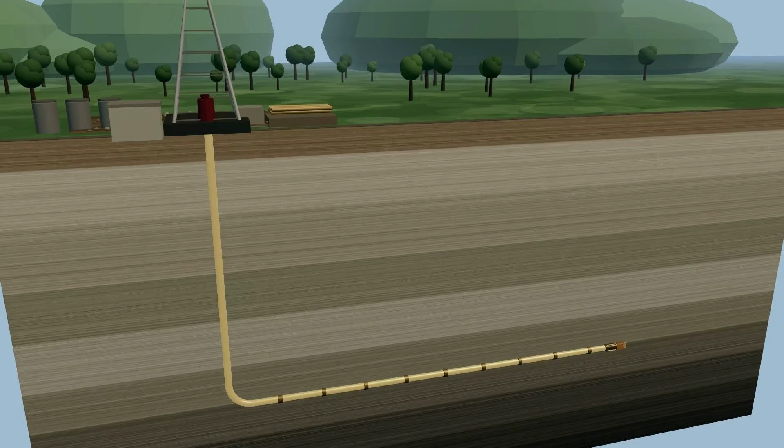2.5 miles. That's how deep the average oil and gas well is drilled into the earth. Some go much deeper, like the deepest hole ever drilled, which reached over 7.5 miles, or about 12 kilometers into solid rock, deeper than the ocean at almost any point on Earth. And we do this every day, all over the world. So how do you actually drill a hole that deep?

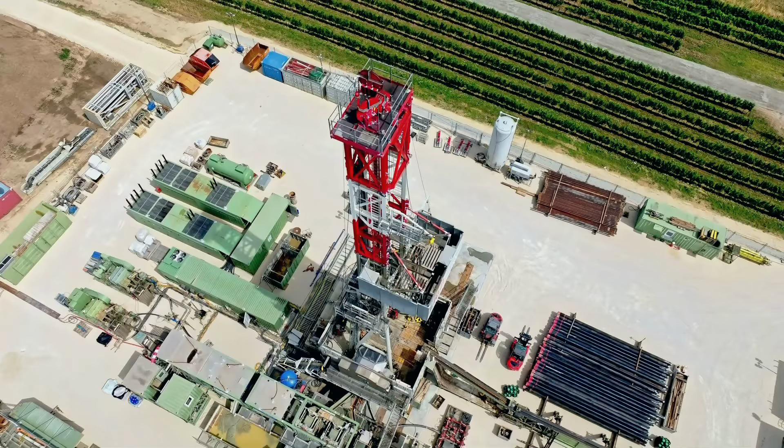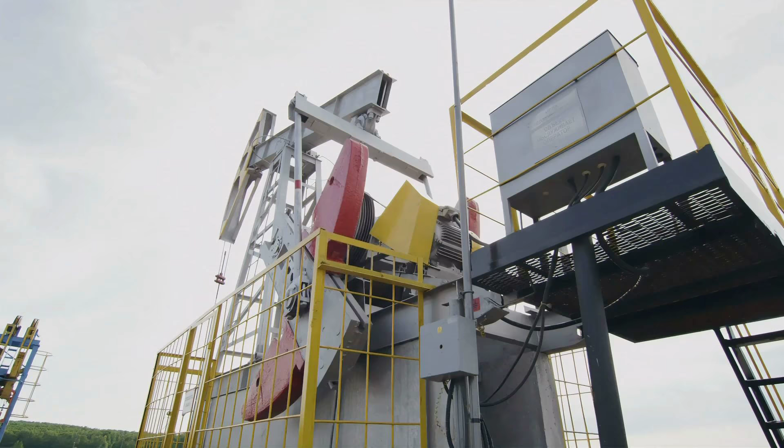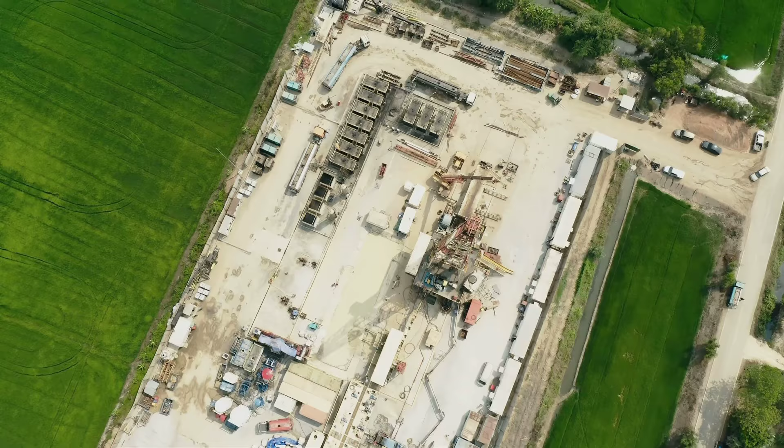The answer starts with what we're actually drilling for. A well goes after hydrocarbons, crude oil, natural gas, or some mix of both, trapped in rock formations deep underground. Most wells these days actually produce gas, or a combination of gas and crude oil. The exact product depends on the geology, not the equipment. And the process of drilling, the actual engineering of it, has gotten dramatically more sophisticated over the past few decades.

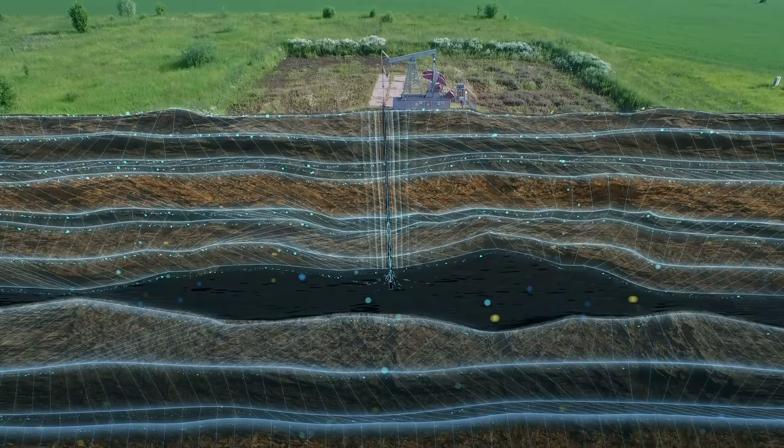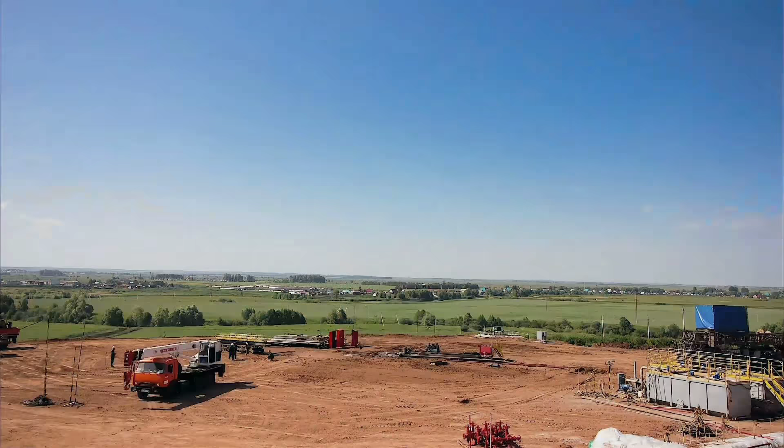Before any drilling begins, you have to decide where to drill. That decision comes from geology, surveys of the rock formations underground, often using seismic data that maps the layers miles below. Once a spot is chosen, a pad is prepared, a leveled, engineered surface with everything the operation needs. Then the rig is moved onto the pad and positioned over the exact point where the well will go.

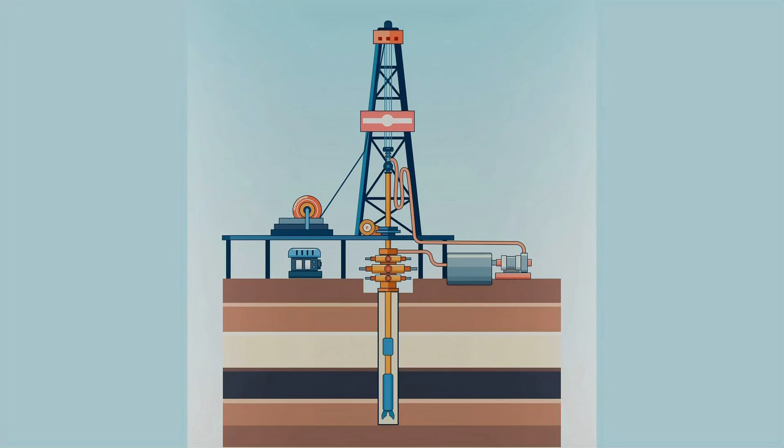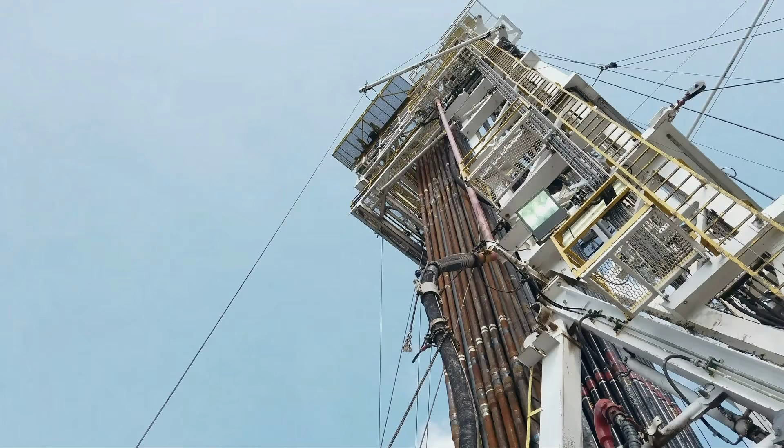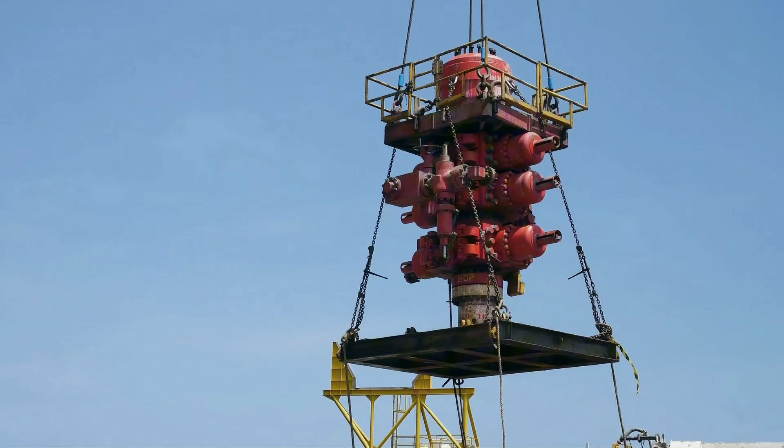Now, the word moved is doing a lot of work in that sentence. A modern deep drilling rig isn't a single structure. It's an entire facility spread across the pad, with dozens of major components. The derrick, the steel tower most people picture when they hear the words drilling rig, is just the most visible part. Around and beneath it sit the mud pumps, the mud tanks, the drawworks, the power generators, the blowout preventer, the control rooms, and storage racks for thousands of feet of drill pipe.

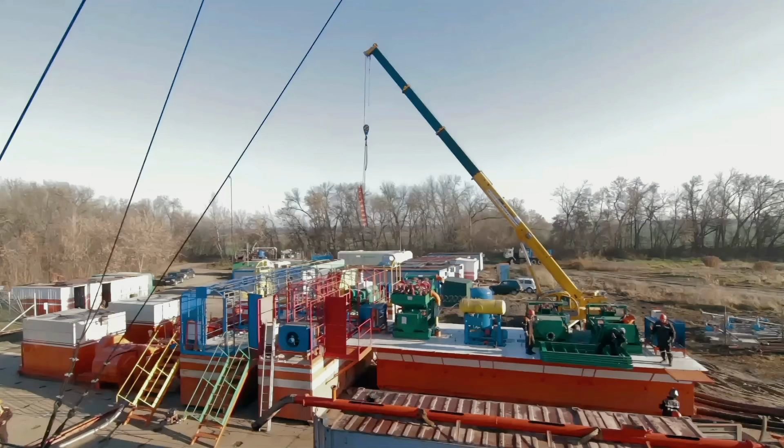Moving a rig between locations can take anywhere from roughly 30 truckloads for a smaller rig to 100 or more for the bigger rigs. The derrick itself is the tower that handles the drill pipe.

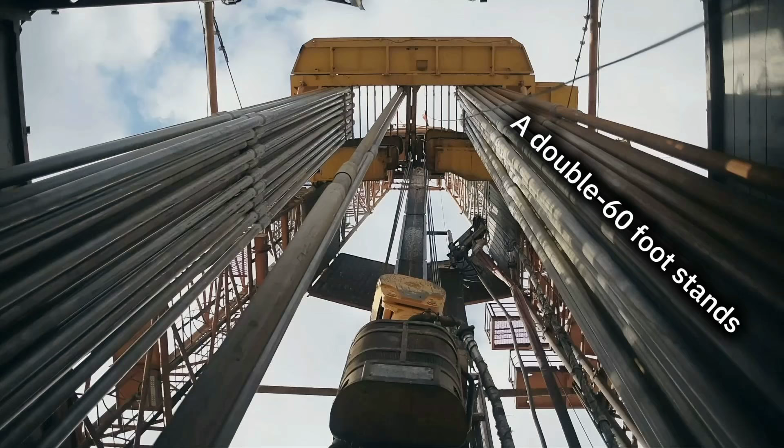Each piece of pipe is about 30 feet long. Larger rigs join multiple pieces into stands. Two joints make a 60-foot stand on a double rig, and three joints make a 90-foot stand on a triple rig. The stands get racked vertically inside the derrick, which is why a deep drilling rig stands as tall as a 10-story building. It has to be tall enough to hold those stands upright.

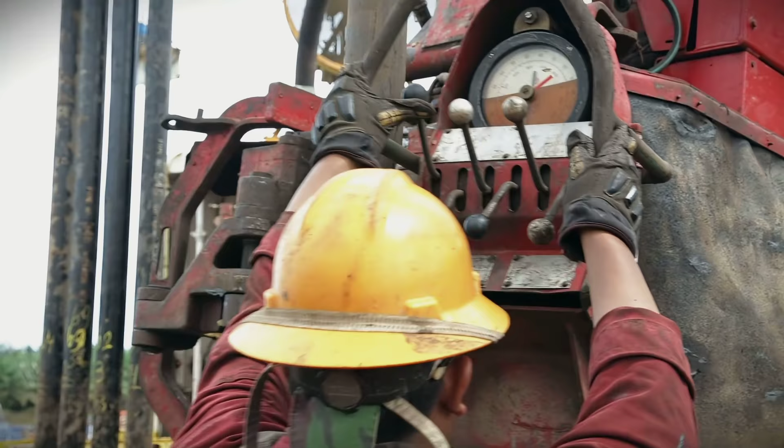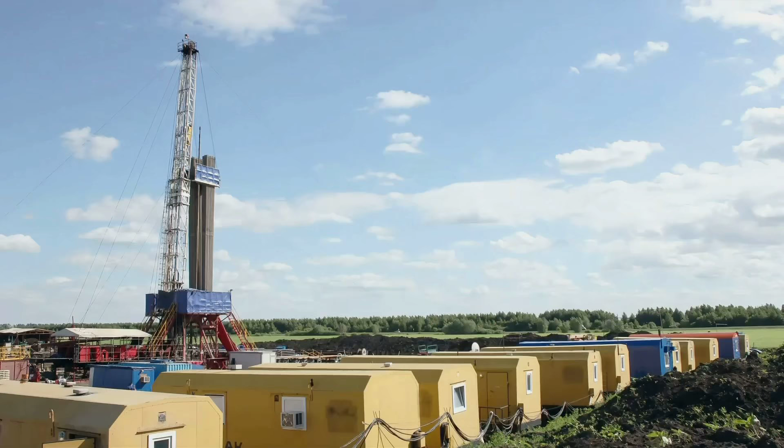At the surface, the drill string descends from the top of the derrick into the hole. As the bit cuts deeper, the crew on the rig floor adds new stands to the top of the drill string. The rig, as a whole, is a system for continuously extending a piece of steel pipe, miles into the earth. The pipe doesn't cut the rock, though.

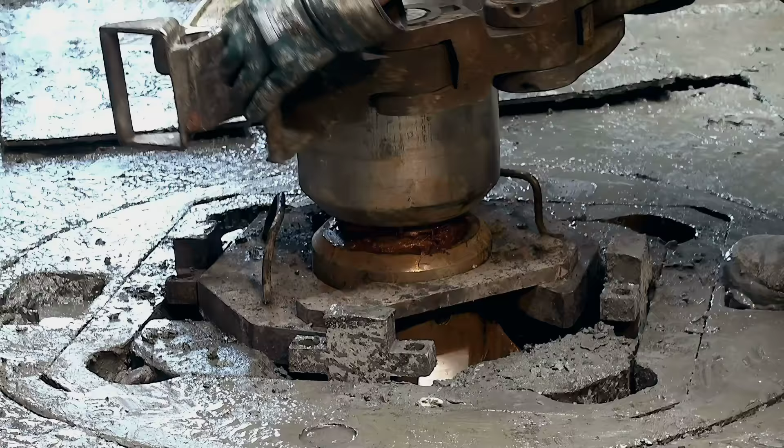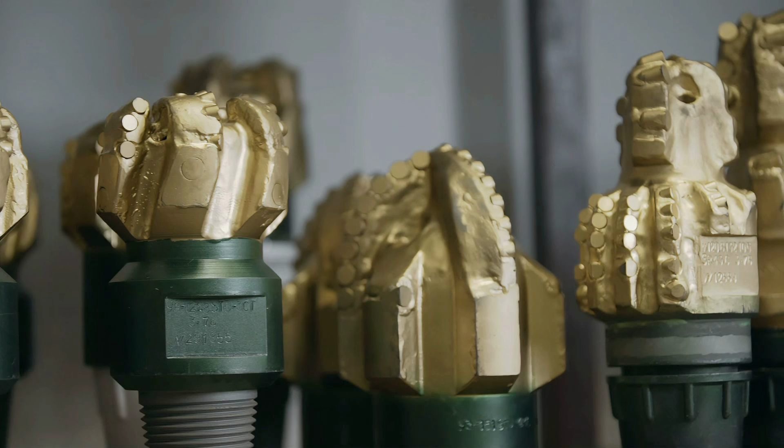Something at the bottom of it does. At the bottom of the drill string is the bit, a steel head studded with cutting elements. Bit sizes depend on the section of the well being drilled. They can be as large as 42 inches at the top of a well, narrowing to as little as 6 inches at the bottom. For softer rock, the cutters are tungsten carbide. For harder rock, they're synthetic diamonds, or polycrystalline diamond compact.

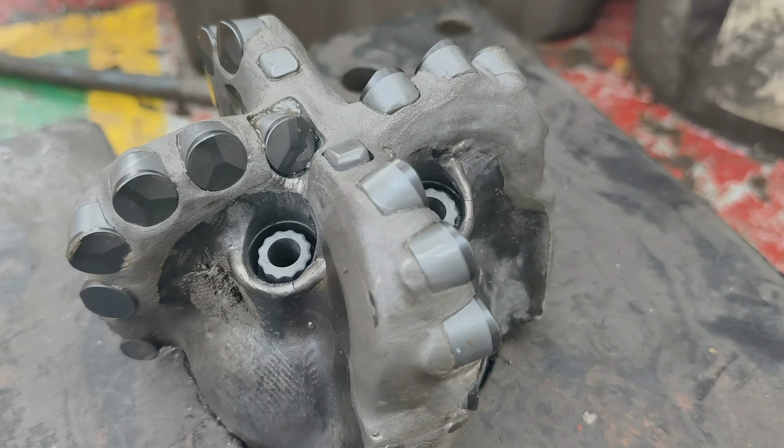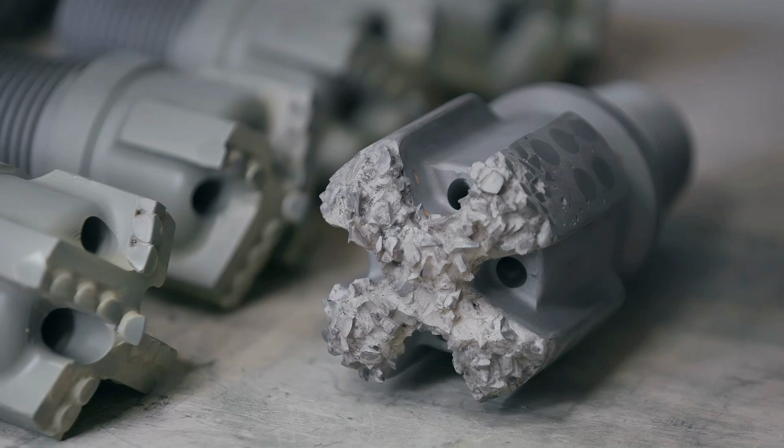The bit doesn't blast or hammer the rock. It cuts it slowly as the drill string rotates. And here's the part that surprises most people: the bit isn't being pushed down. The drill string above it, thousands of feet of solid steel pipe, weighs enough on its own to provide the cutting force. The driller's job at the surface is to control how much of that weight rests on the bit. Too little, and the bit doesn't cut. Too much, and the bit wears out fast, or the well goes off course.

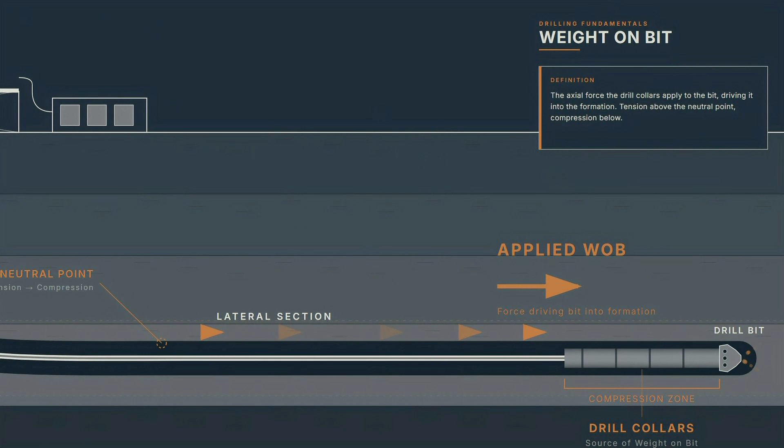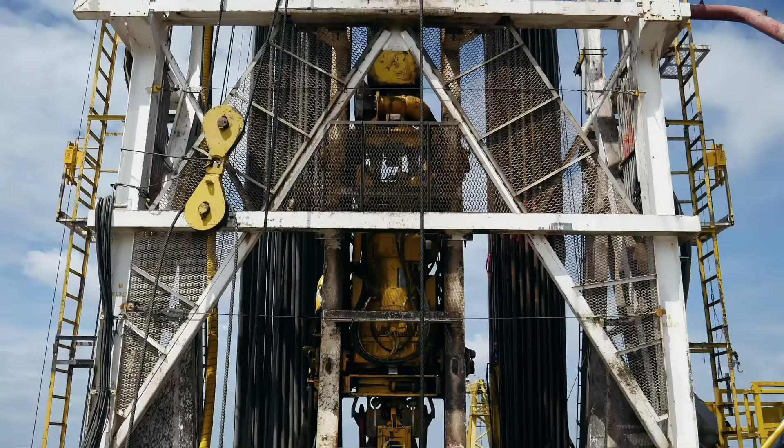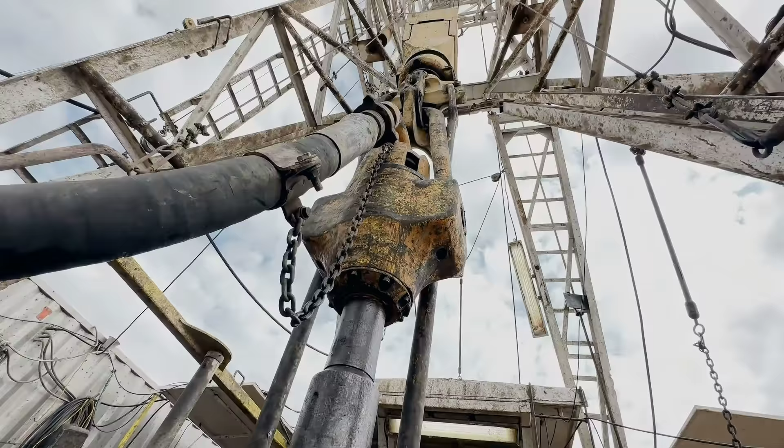The amount of weight applied is called weight on bit, or WOB, and it's one of the most carefully controlled variables in the entire operation. The rotation comes from a top drive, a large motor assembly that hangs inside the derrick and threads into the top of the drill string. The whole unit weighs hundreds of thousands of pounds and travels up and down the derrick on guide rails as drilling progresses. Older rigs used a system called a Kelly, where rotation came from a rotary table on the rig floor. But modern rigs almost all use top drives. They're faster, safer, and give the driller more control.

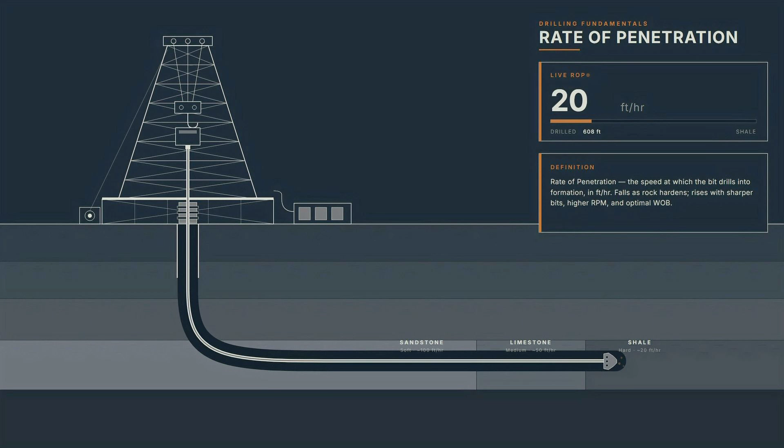As the top drive turns the entire drill string, the bit at the bottom, thousands of feet below, turns with it, cutting rock and advancing the hole. The combination of weight on the bit and how fast it spins determines how fast you drill. That speed is called the rate of penetration, or ROP.

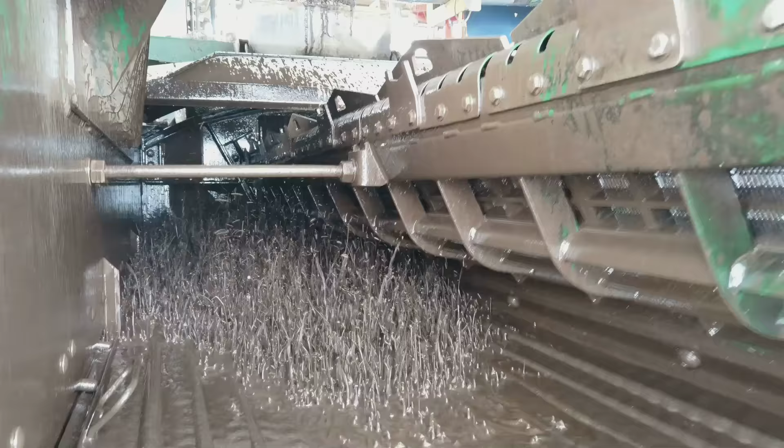But none of this works without another component that most people would never guess: the drilling fluid, commonly referred to as the mud. The mud travels down through the pipe, out through nozzles in the bit, and back up to the surface through the annulus, the open space between the drill string and the wall of the hole. At the surface, the mud passes through shakers, vibrating screens that separate out the cuttings and solid debris.

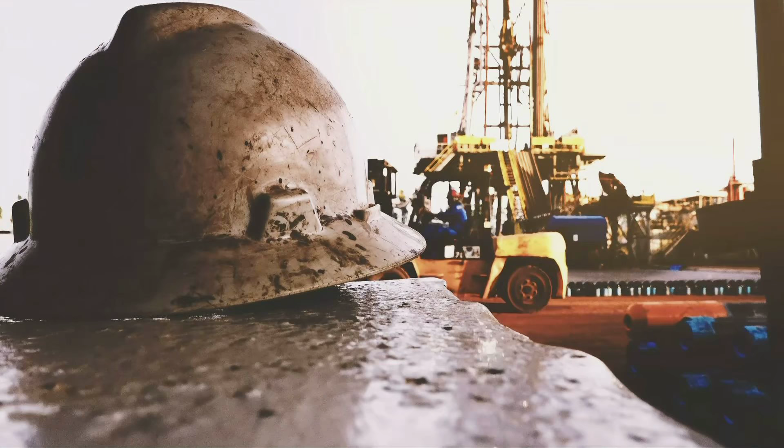The cleaned mud is then conditioned and pumped back down the pipe to start the loop again. Now, most people, if they think about drilling mud at all, assume it's some kind of lubricant. It isn't. The mud is doing at least 4 critical jobs at the same time.

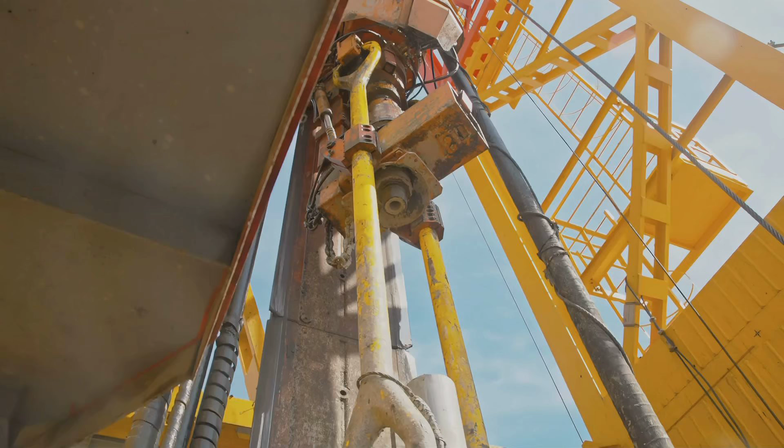First, it carries the cuttings, the small pieces of the rock formation being drilled, up and out of the hole through the annulus. Without the mud, the cuttings would pile up at the bottom and jam the drill string. Second, it cools the bit. At depth, friction and rock temperatures would otherwise destroy it within hours.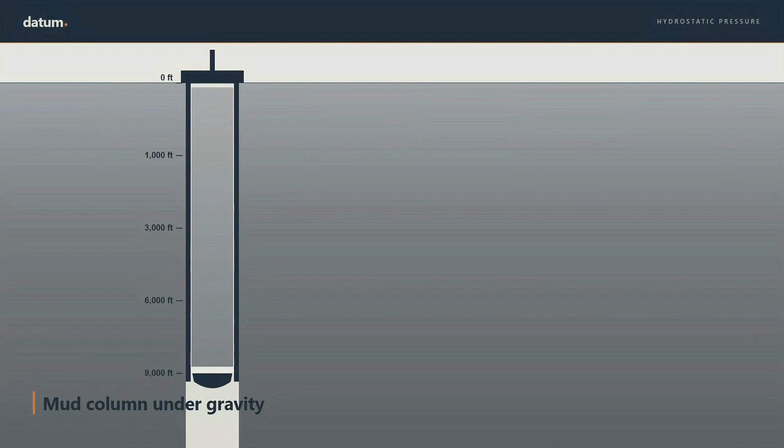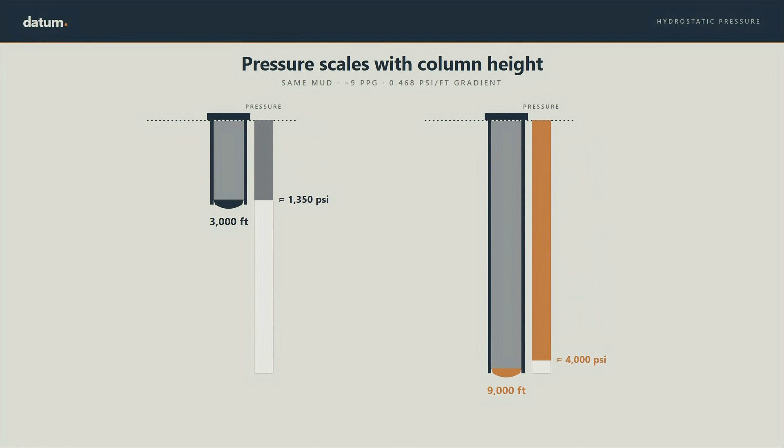Third, and this is the part most people miss, the mud is creating hydrostatic pressure inside the well. The column of mud, from the surface down to the bit, has weight, and gravity acting on that mass creates pressure inside the well. The taller the column of mud, the greater the pressure at the bottom, meaning deeper wells naturally have higher hydrostatic pressure at the bit. This pressure pushes outward against the walls of the hole at every depth.

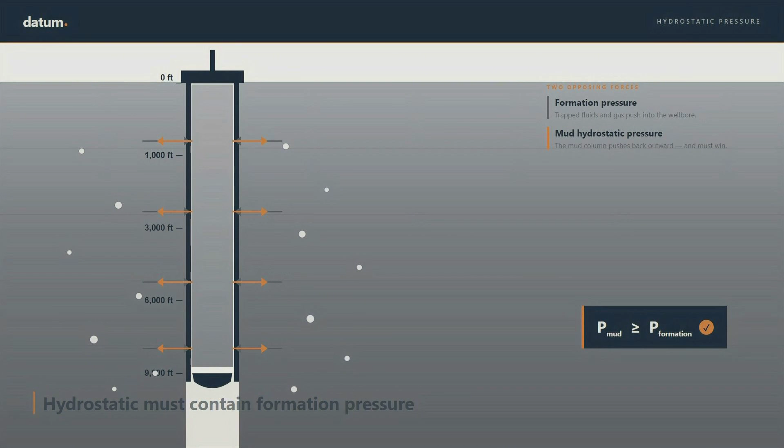And it has to. The rock formations the well passes through are themselves under pressure, and any fluids or gas trapped inside those formations will flow out uncontrollably, if given the chance. The mud's hydrostatic pressure has to push back hard enough to keep them from flowing into the well uncontrolled.

This is where mud density, also called mud weight, becomes critical. The driller is constantly balancing mud weight against the formation pressure at depth. Too light, and the well kicks, meaning formation fluids or gas flow into the well and increase the risk of a devastating blowout. Too heavy, and you can actually fracture the rock formation and lose your mud into it, commonly referred to as lost circulation.

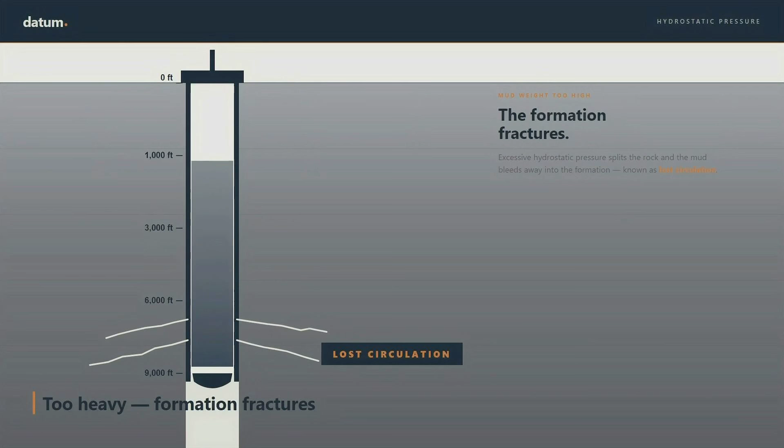And the fourth job, the cuttings that come up in the mud are the only direct sample anyone gets of what's actually down there. Geologists at the surface examine those cuttings to confirm what formation the bit is drilling through.

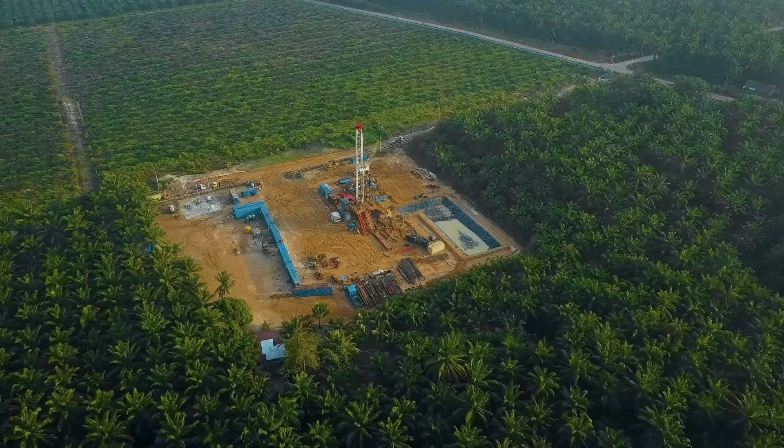Here's something most people don't realize about deep wells. The hole isn't drilled all at once, and it isn't a single hole. A well is actually a series of nested steel casings, each one smaller than the last, cemented in place inside the earth, like a telescope made of pipe, miles long.

The process works like this. You drill the first section of the well using the largest bit. Once that section is complete, you pull the drill string back out and run a steel casing down the hole. Cement is then pumped between the casing and the rock wall, locking the casing permanently in place.

Then, a smaller bit goes back down the inside of that casing, drills the next section deeper, and the process repeats, each casing anchored inside the one above it, each section getting progressively narrower. Each casing has a specific industry name: conductor, surface, intermediate, production.

And after the surface casing is set, a blowout preventer is installed at the wellhead to protect the well's integrity as drilling continues deeper. That's not a hole someone drilled in one go. It's a precision-engineered structure of cemented steel, built downward in stages.

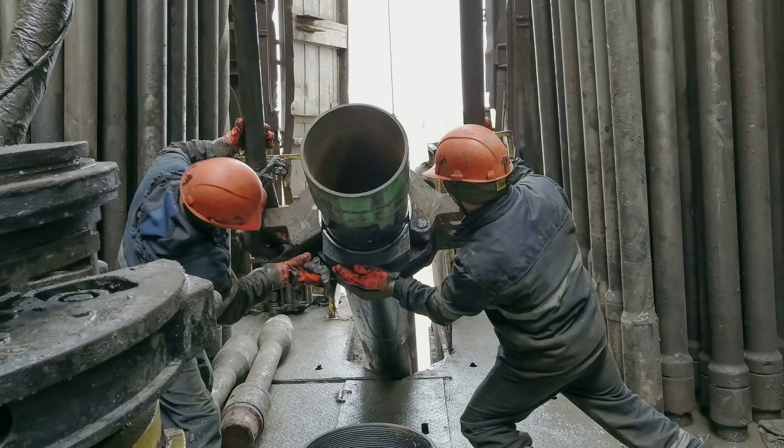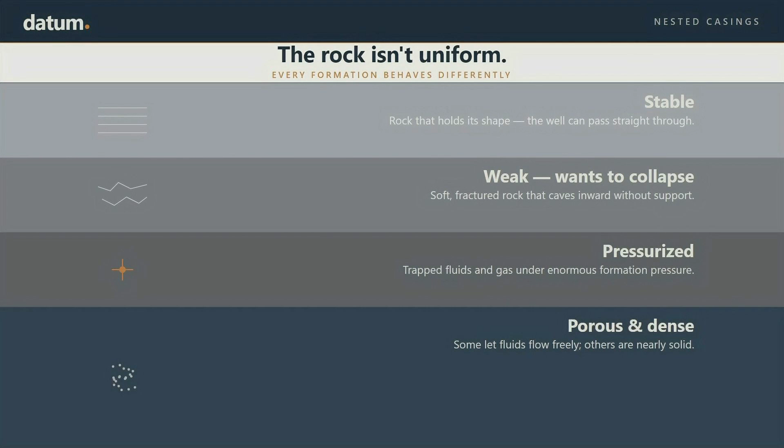Why go through all this? Because the rock formations the well passes through have very different properties. Some are stable, others are weak and want to collapse. Some contain pressurized fluids that need to be isolated from the well itself. Some are porous, some are dense.

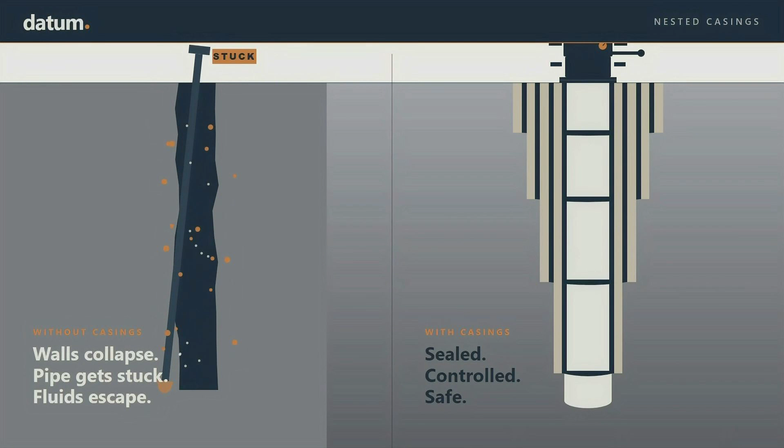Without the casings, deeper formations would collapse the well from the sides, or contaminate what you're trying to produce, or let fluids flow where they shouldn't. The casing turns the well from a vulnerable hole into a controlled, sealed structure that can be operated safely.

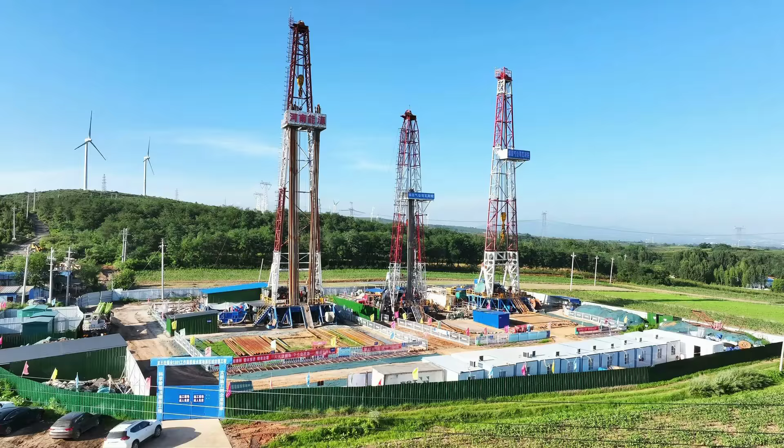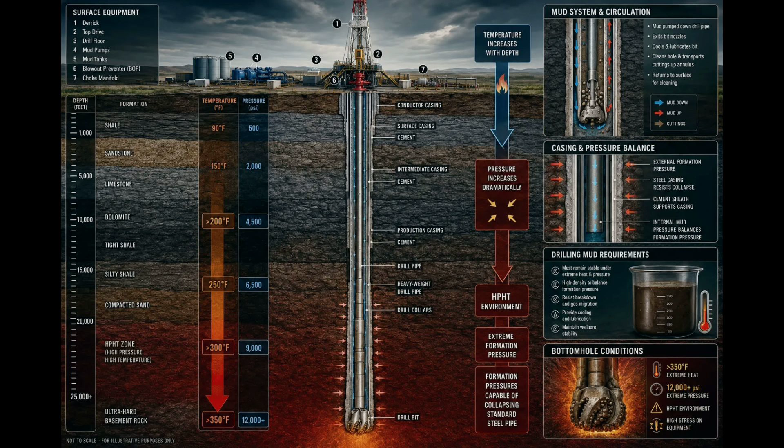But getting there means drilling through some of the most extreme conditions on the planet. Every 1,000 feet down, the rock gets hotter, and the pressure around the well gets higher. At 10,000 feet, temperatures are routinely above 200 degrees Fahrenheit. At 20,000 feet, they can exceed 300. At the deepest sections of the longest wells, temperatures climb past 350 degrees, and the surrounding pressure approaches what would crush most steel equipment ever built.

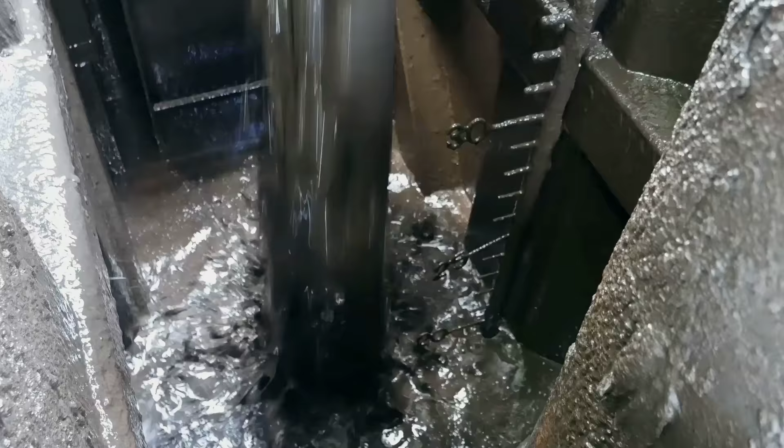Drilling mud has to be engineered to remain stable. The bit has to function. The casing has to withstand pressures that would collapse normal pipe.

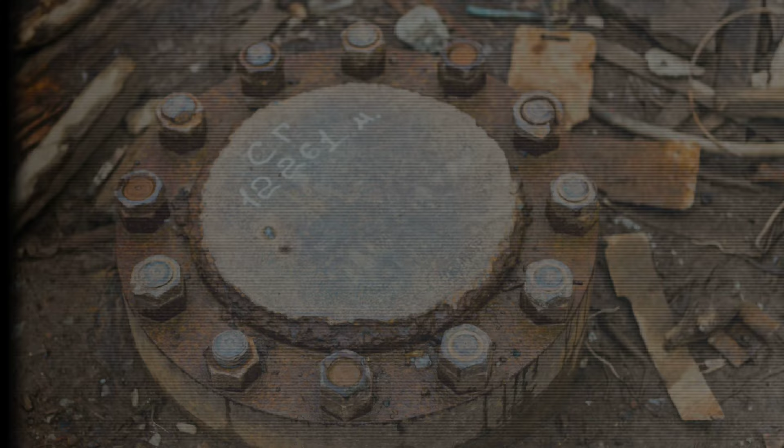The most extreme example is the Kola Superdeep borehole, a Soviet scientific project that began in 1970, with the goal of drilling as deep as possible into the Earth's crust. By 1989, they had reached a bit over 40,000 feet, about 12.25 kilometers into solid rock.

They didn't stop because of equipment failure in the usual sense. They stopped because the rock at that depth was so hot and under so much pressure that it was effectively flowing. The borehole walls were closing in on themselves. The rock at that depth wasn't behaving like rock anymore. It was behaving like very stiff toothpaste.

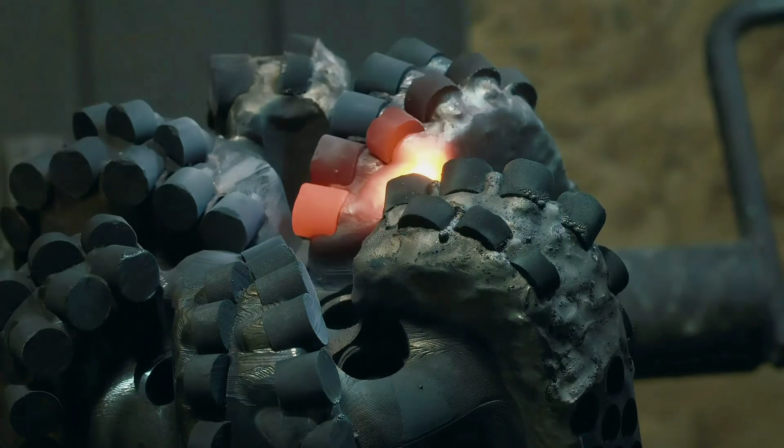There's another problem that gets worse with depth. Bits wear out. A bit drilling through hard rock at 20,000 feet might only cut 1 to 5,000 feet under high temperatures before it's done.

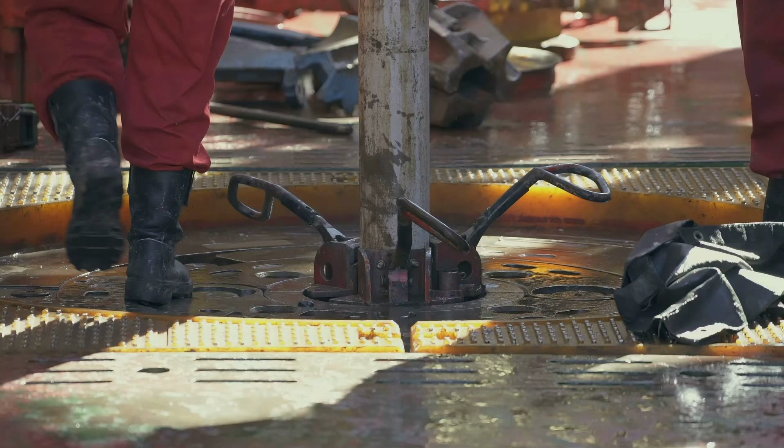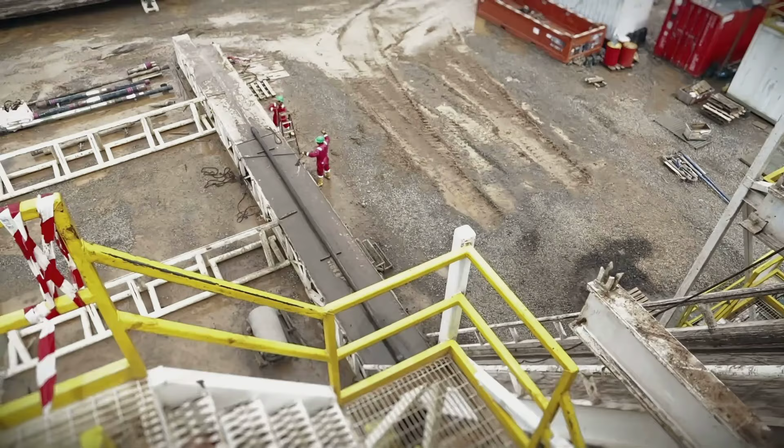Replacing the bit means pulling the entire drill string out of the hole, joint by joint, stand by stand, back to the surface. A new bit goes on, and then the whole drill string has to be sent back down again, joint by joint, stand by stand, until it reaches the bottom and drilling can resume. This process is called tripping the pipe.

On a 20,000-foot well, a full round trip can take 24 to 48 hours of continuous work. The actual cutting time on a well is often a minority of the total operation. Most of the time is spent tripping the pipe in and out of the hole.

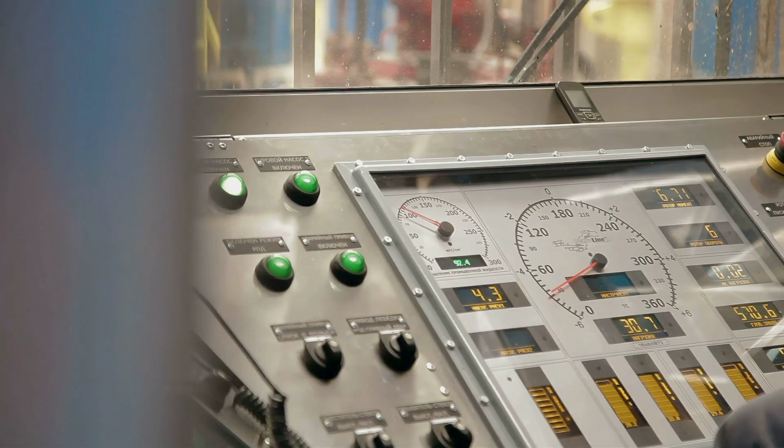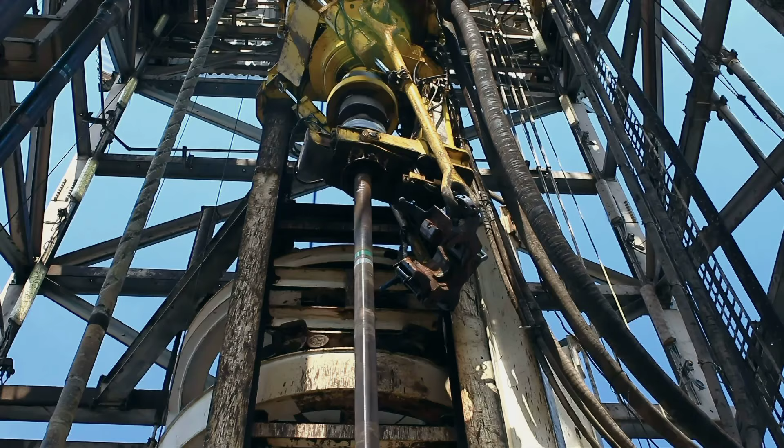Here's a question that took the industry decades to solve. The bit is miles below the surface, inside a hole filled with mud, inside a steel casing, inside thousands of feet of rock. You can't see it, you can't film it. So how do you know what's actually happening down there? How do you know what direction the bit is pointing, what temperature it's working at, what kind of rock it's cutting through?

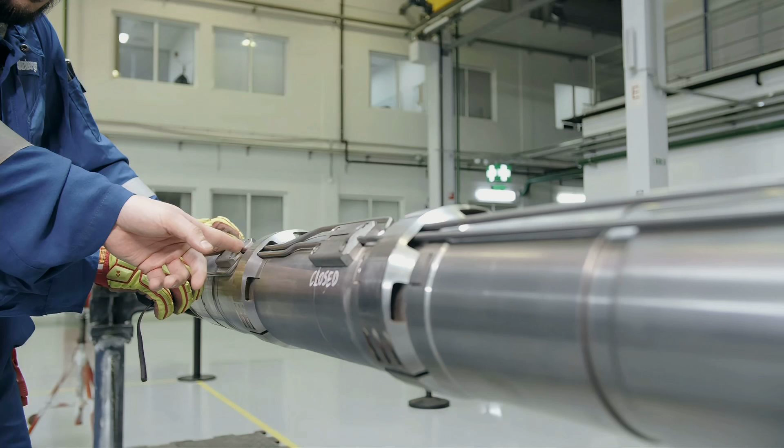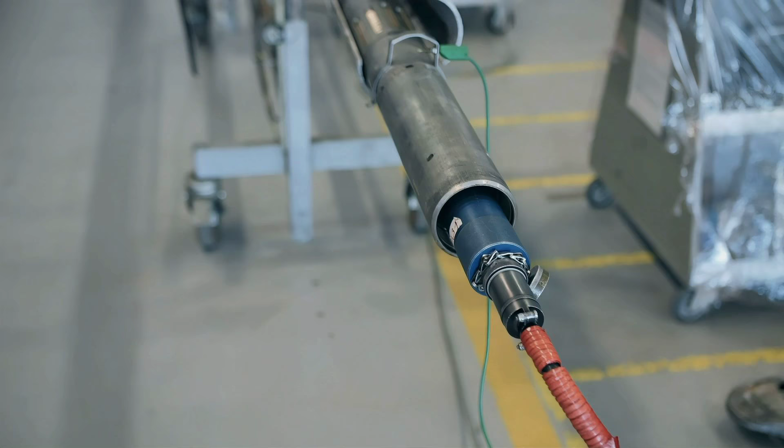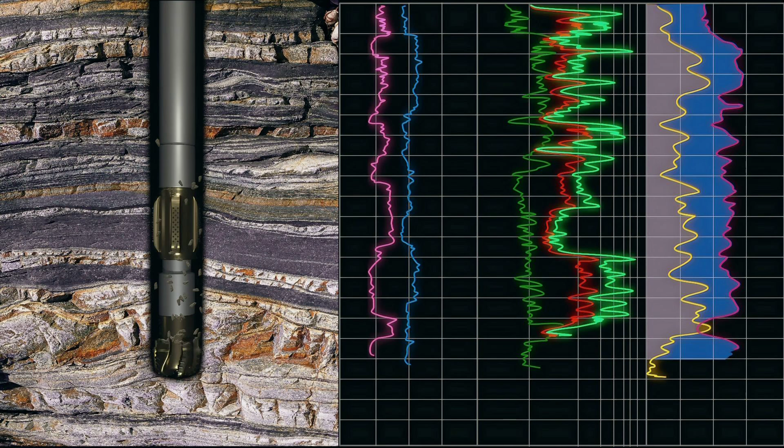The answer is a pair of tools installed just above the bit, inside what's called the bottom hole assembly. The first is MWD, measurement while drilling. Think of it as the bit's ears. It tells you what the bit is doing: direction, inclination, temperature, pressure, the weight resting on the bit, all in real time. The second tool is LWD, logging while drilling.

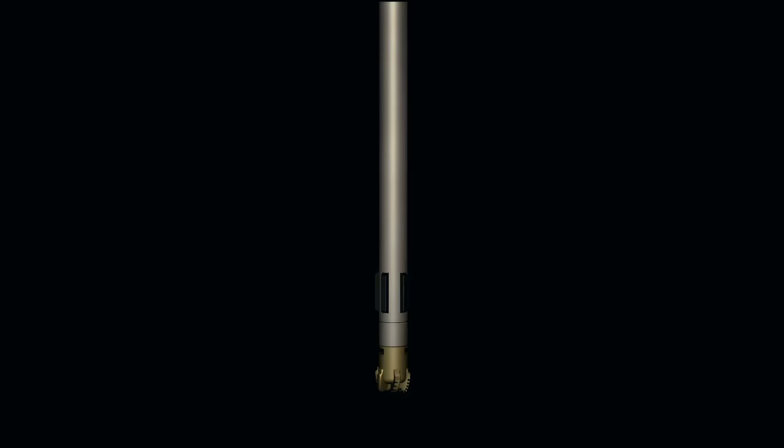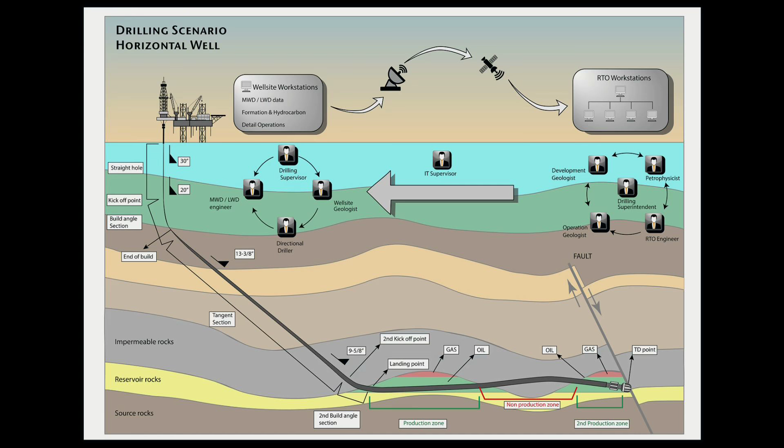Think of LWD as the bit's eyes. It tells you what the bit is seeing, using sensors that measure the properties of the rock the bit is cutting through: electrical resistivity, natural radiation, density. Together, MWD and LWD give the surface team a complete picture of both the operation and the geology, miles below their feet.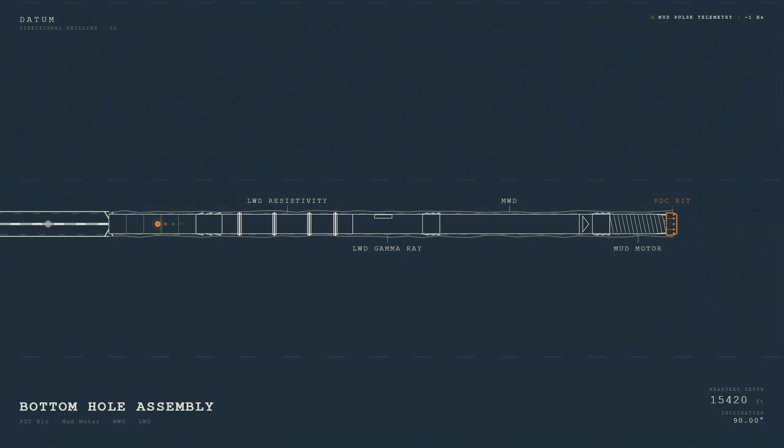But here's the strange part: how do these tools send their data up to the surface? There's no cable running miles down the well. Instead, they send data the same way a submarine sends sonar pings, through the drilling mud column. The tools generate precisely timed pressure pulses in the mud that travel up the column at the speed of sound through fluid. At the surface, sensors detect those pulses, and computers decode them into data.

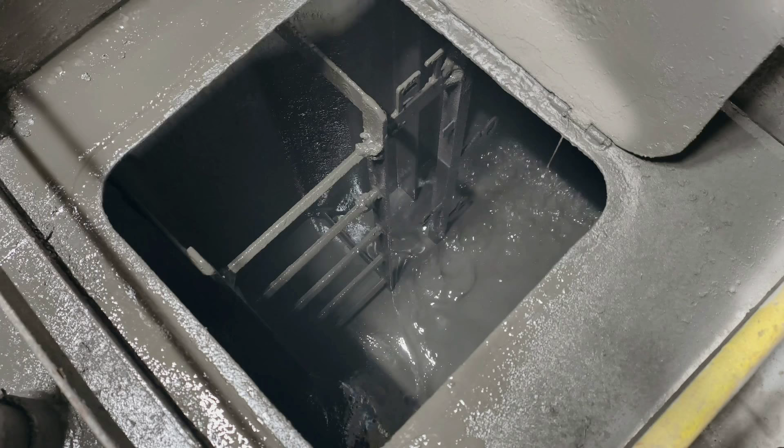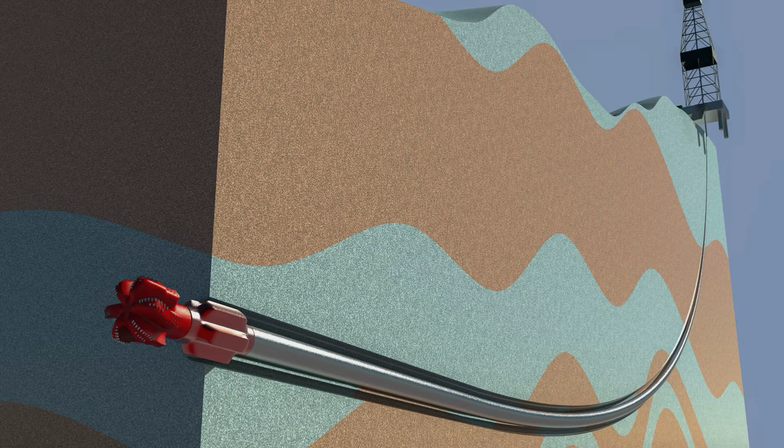The drilling mud isn't just a hydraulic system, it's also the communication channel between the bit and the rig. And those messages are about to do something even more remarkable: they're going to let drillers steer the bit.

Now, most people imagine a well as a straight line, going straight down. That picture is wrong. Modern wells curve. They go down for a couple of miles, and then they turn, sometimes by 90 degrees, and travel horizontally for another mile or two, all underground. A single well can change direction multiple times before it reaches its target.

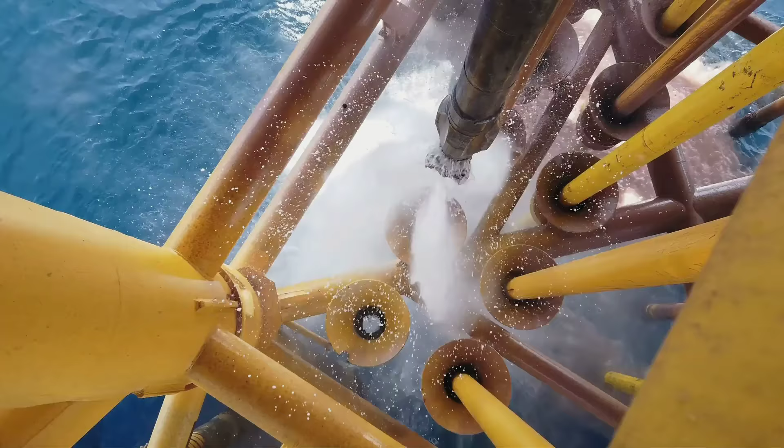How is this possible? The trick is in the bit assembly. Just above the bit, the drill string has a slight, deliberate bend, typically anywhere from 0.5 to 3 degrees off vertical. Depending on how aggressive the turn needs to be, there's also a small motor in the bottom hole assembly, a positive displacement motor, or PDM, that can rotate the bit independently of the drill string above it.

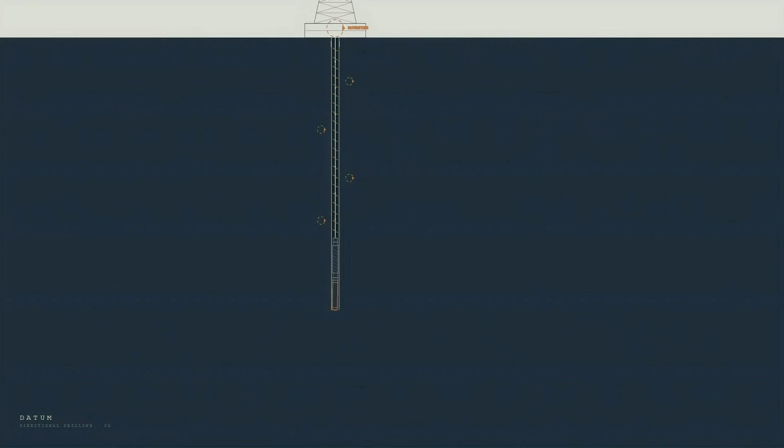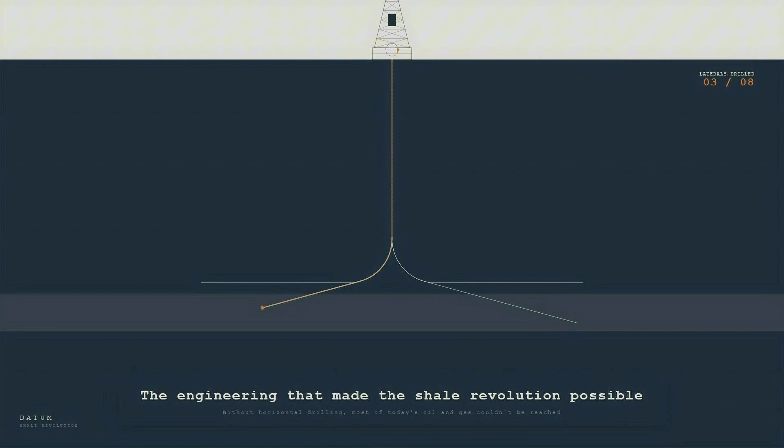If the driller wants to go straight, the entire drill string rotates from the surface, and the slight bend averages out. If the driller wants to turn, the drill string above stops rotating, and only the motor at the bottom spins the bit. The slight bend now points consistently in one direction, and the bit drills that way. Using real-time data from the MWD tool, the driller can change the well's path by precise amounts. The result is engineering that looks almost surgical.

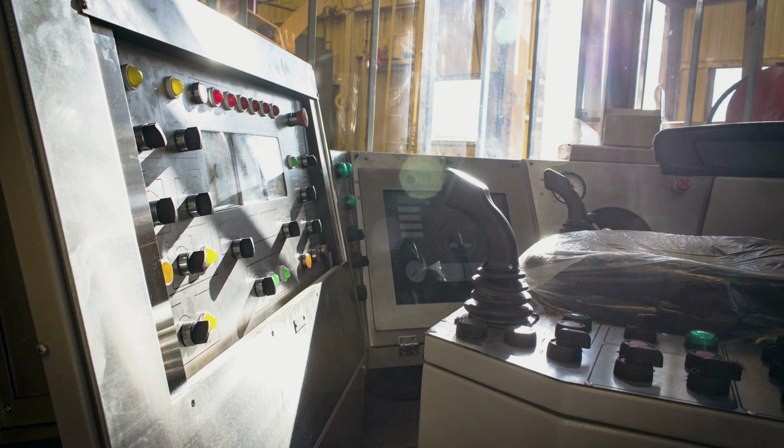Modern drilling has changed in another way that matters. On the most advanced rigs, much of the operation is now automated. Computer systems monitor data and continuously adjust drilling parameters, weight on bit, rotation speed, mud properties, to make the operation faster, safer, and more cost-effective.

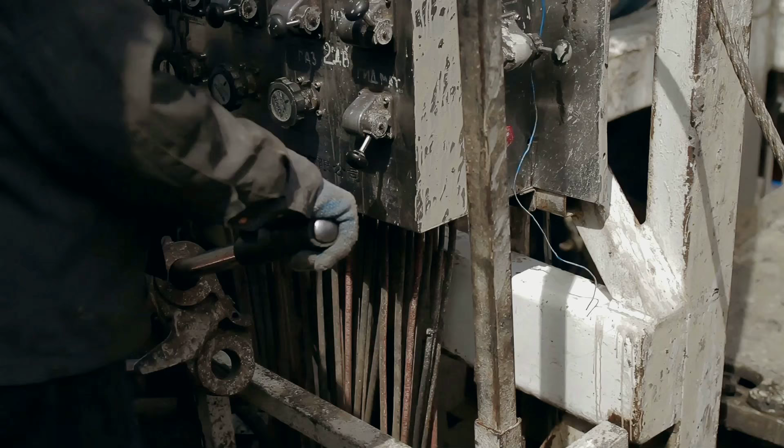But it's worth being honest about what this actually means. Not every rig is running this way. There are still plenty of rigs operating with traditional controls, run by drillers reading gauges and trusting their experience, the way the job has been done for decades. The fundamental skill of drilling, reading what the rig and the formation are telling you and making the right call, still lives with the driller, whether the controls are computerized or not.

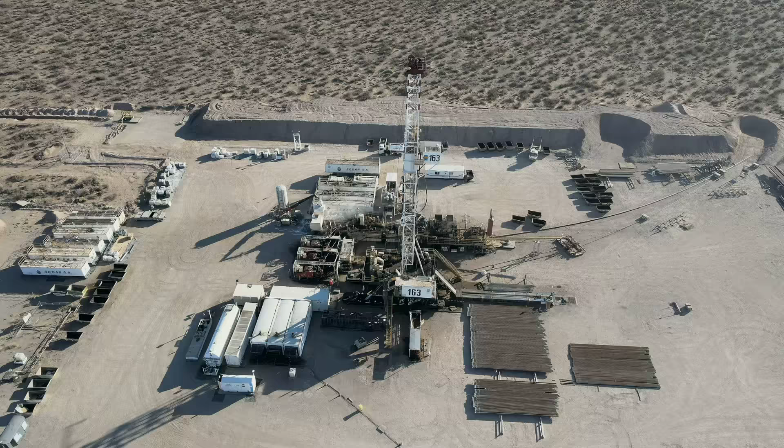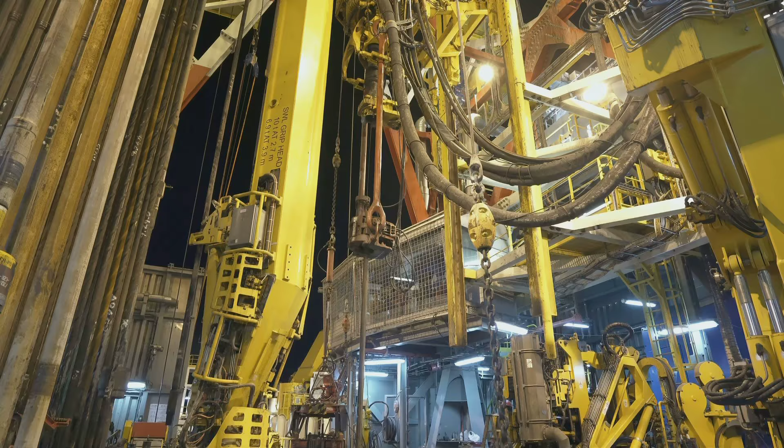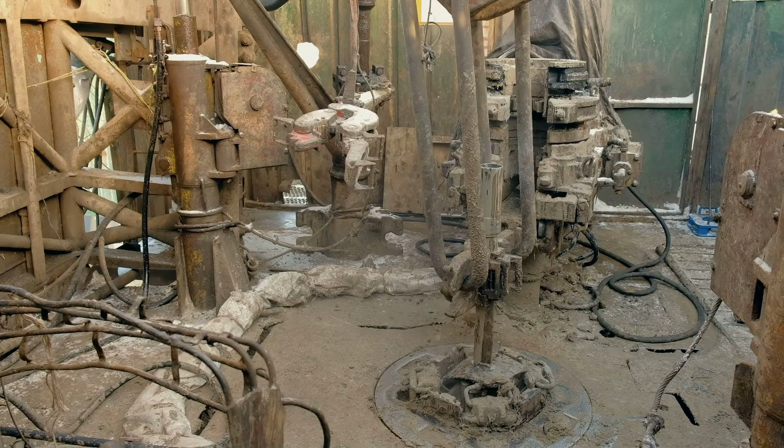Let's pull back for a moment and look at what we've just walked through. A drilling rig is, in the simplest terms, a system for extending a piece of steel pipe miles into the earth. But what we've actually built is something much stranger: a precision instrument made of nested steel and engineered fluid, operating blind, in temperatures that would destroy most materials, against pressures that would crush most equipment, in formations that behave like solid rock at one depth and like toothpaste at another.

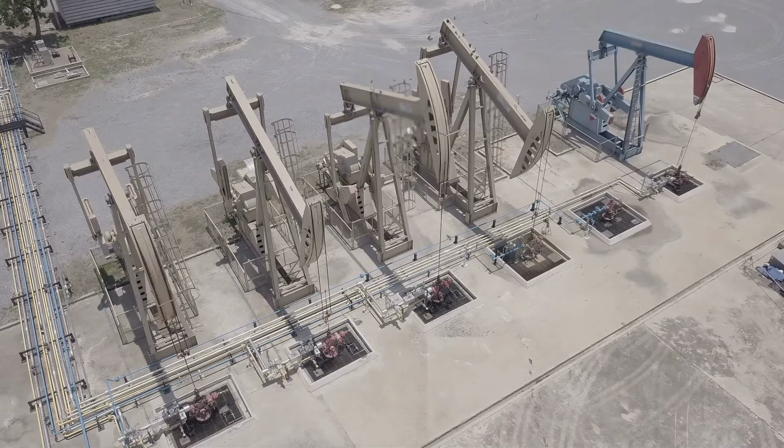We do this routinely, thousands of times a year. Most people never think about where their gas, their plastics, their fuel comes from, but this engineering is one of the quiet wonders of the modern world.